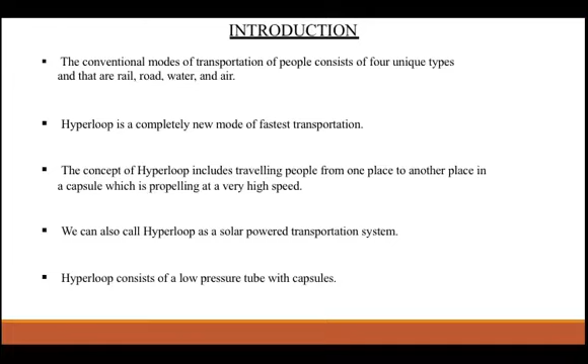So this will come in a later part of my presentation. So next, what is Hyperloop? Hyperloop will be supported on elevated tracks, as I said, and it will be a magnetically levitated train which runs inside a long tube or pipe.

Hyperloop consists of low pressure tubes with capsules that are transported at both low and high speeds. The capsules are supported on a cushion of air featuring pressurized air and aerodynamic lift. The capsules are accelerated via a magnetic linear accelerator affixed at various stations on the low pressure tube, with rotors contained in each capsule.

The inside capsule will have a capacity to hold 28 passengers, and passengers may enter and exit Hyperloop at stations located either at the ends of the tube or at the branches. This system will fulfill the growing need of a transportation alternative, and it will reduce travel time between cities which are congested due to traffic.

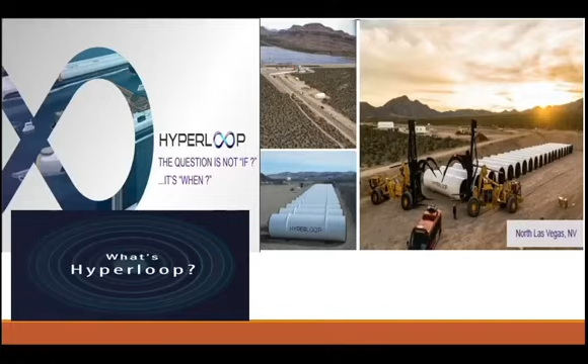Next, let us discuss some history or background of Hyperloop. The Hyperloop concept was invented and designed in 1812 by British mechanical engineer George Wenger, and later polished by various people like George Medhurst in 1827, and later by other people during the 19th century.

Bachelet introduced the core idea behind magnetically levitating trains as early as 1910. Over the years, these ideas have been further refined, for instance, by the Rand Corporation in 1972 with their very high-speed transportation system. This Hyperloop was first proposed by Elon Musk, who is the current CEO of Tesla Motors and SpaceX.

He thought of a dream which would transport people and goods at a speed of more than 1000 km per hour. He proposed a Hyperloop Alpha in a white paper. He wrote his ideas, and later during a press conference he gave a brief presentation on his ideas.

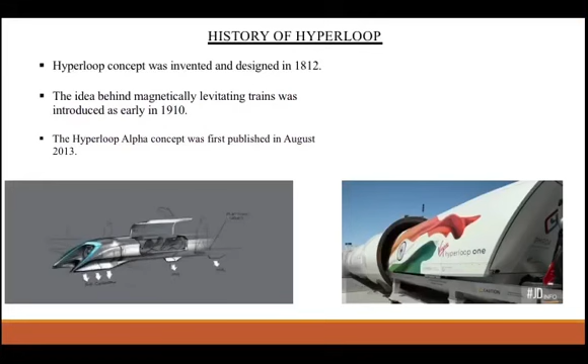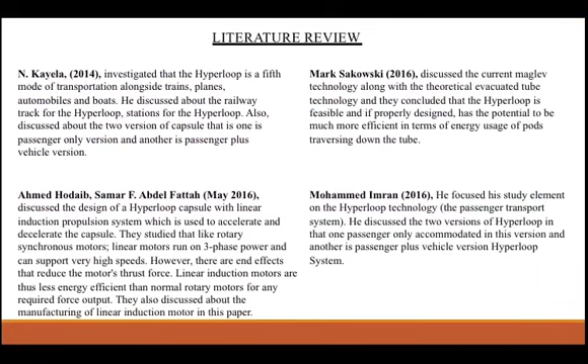Next, literature review. I've collected various literature reviews on my Hyperloop topic, but I've included just 4 because of space.

Next, principle. Earlier I mentioned Hyperloop will work on the principle of magnetic levitation. The principle of magnetic levitation is that a vehicle can be suspended and propelled on a guidance track made with magnets. The vehicle on top of the track may be propelled with the help of a linear induction motor, as passenger pods travel through a low pressure, pylon-supported tube.

In the Hyperloop system, an air compressor fan is fitted on the front side of the pod which sucks the air. It transfers high pressure air from the front side to the rear side of the capsule or pod, and it propels the pod. It creates an air cushion around the pod so that the pod is suspended in air within the tube. On the basis of the magnetic levitation principle, the pod will be propelled by a linear induction motor.

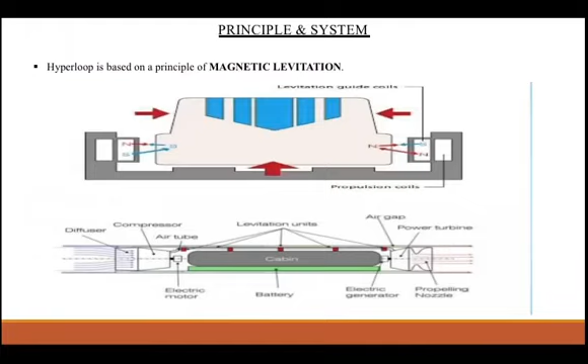By the linear induction motor, the capsule is sent from one place to another place. The pod will be self-powered, as I have mentioned earlier. Next, let us discuss the various components of the Hyperloop system: capsule, tube, propulsion, route.

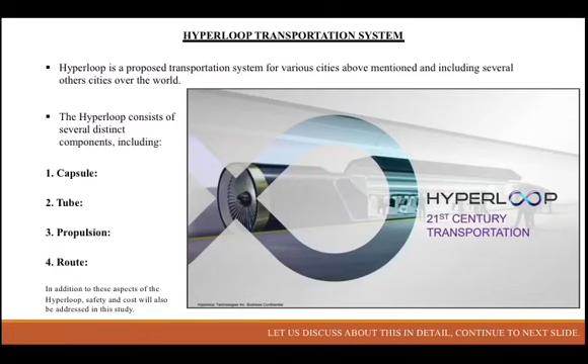First of all, capsule. Capsule is a sealed capsule which will carry 28 passengers at a time, and there will be two versions of capsules. One is passenger only version and second one is passenger plus vehicle version.

Passenger capsule, assuming an average departure time of 2 minutes between capsules, a minimum of 28 passengers per capsule are required to meet 840 passengers per hour. The Hyperloop passenger plus vehicle capsule will depart as often as the passenger only version, but will accommodate 3 vehicles in addition to passengers.

Next, the capsule will be made of the following components: inlet, compressor fan, air storage, firewall, seating, suspension, and batteries. Solar panels will be mounted above the tracks, and the energy stored will be in batteries.

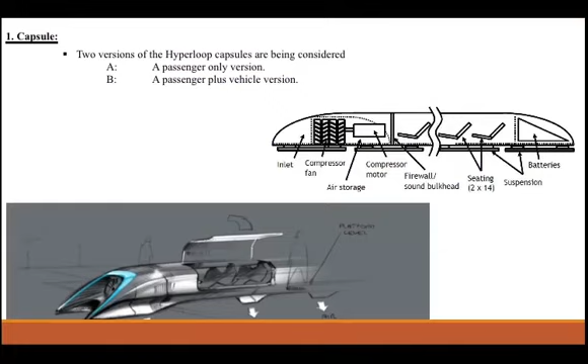The previous figure shows the Hyperloop passenger capsule which was first proposed by Elon Musk in his presentation during Hyperloop Alpha, and later the rendering and conceptual design was also made, as shown.

The expected pressure inside the tube will be maintained around 0.015 psi, which is about 1/6 of the pressure on Mars or 1/1000 of the pressure on Earth.

In order to minimize the cost of Hyperloop, it will be elevated on pillars, which greatly reduce the footprint required on the ground and size of the construction area required, thanks to the small pillar footprint and maintaining the route as close as possible to currently operated highways.

Next, the geometry of the tube will depend upon the choice of the passenger version of Hyperloop or the passenger plus version of Hyperloop.

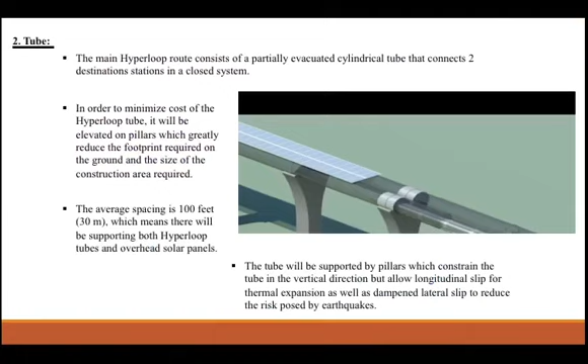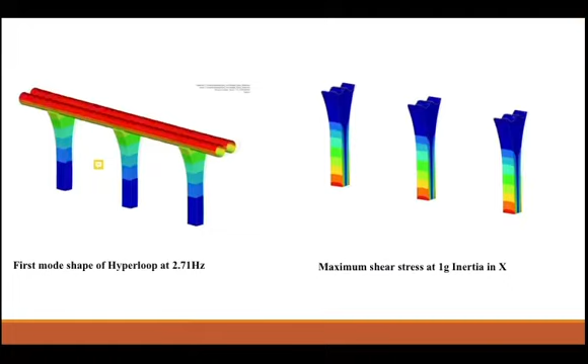Next, this figure shows the first mode shape of Hyperloop at 2.71 Hz, and various mode shapes were conducted before constructing. The second is maximum shear stress at 1g inertia. So these are the tests which were analyzed in Hyperloop Alpha.

Next, we discuss routes. The Hyperloop will be capable of traveling between Los Angeles and San Francisco in approximately 35 minutes. This requirement tends to size other portions of the system given the performance specification of the Hyperloop. A route has been devised to satisfy these design requirements.

The Hyperloop should be based on several conditions: first, maintaining the tube as closely as possible; limiting the maximum capsule speed to about 760 miles per hour; limiting acceleration on the passengers to 0.5 gravity; optimizing location of the linear motor sections driving the capsule; and local geographical constraints such as national parks or railroads, airports.

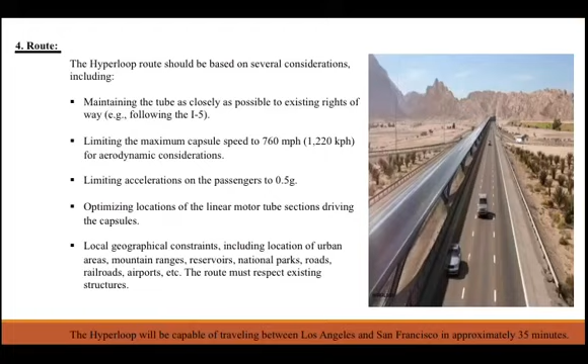The picture shows two routes. The first one is from Los Angeles and Las Vegas. This is another route which was proposed after the first route, and the second picture shows the route between Delhi and Mumbai. This was the second route in India, proposed in 2019.

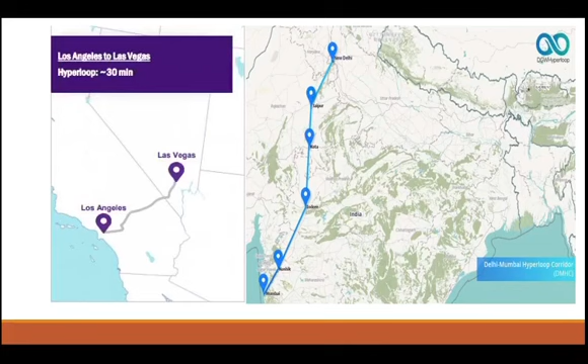So let us discuss Hyperloop in India. First of all, as I mentioned, two years ago the Mumbai government signed a deal with Hyperloop One to propose a route between Mumbai and Pune, that is handled and operated by Pune Metropolitan Region Development Authority. The second one, proposed in 2019, is the Delhi Mumbai Hyperloop corridor.

So let us discuss the Delhi Mumbai Hyperloop corridor, the second route proposed. Currently between Delhi and Mumbai, the travel time is approximately more than 10 hours. If Hyperloop succeeds in proposing and constructing a route, then the travel time will reduce to 3 hours and 52 minutes.

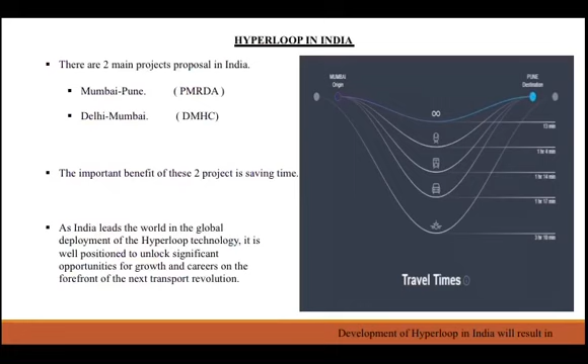This will have an impact on the Indian economy because it will generate more employment opportunities. Due to the Hyperloop, infrastructure will increase, cities will be developed, and business opportunities will increase.

Next, India's need for Hyperloop. The 21st century is supposed to be India's, as everyone knows, but this ongoing process of urbanization would create huge stress in the existing cities, which are already unable to support rapid growth with poor infrastructure.

Now, let us discuss the advantages and disadvantages. Advantages of this transportation system: it saves traveling time, there is no problem of traffic, it is powered by solar panels, it can travel in any kind of weather, cost of Hyperloop is low and it is more convenient, it is resistant to earthquakes, it is pollution free, it is lightweight, and it can travel at a speed of more than 760 miles per hour.

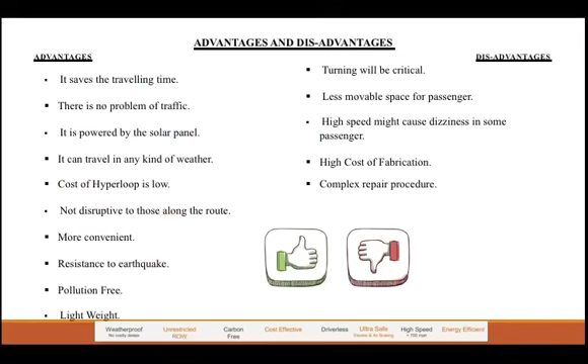Next, we will discuss safety and cost. The design of Hyperloop has been considered from the start with safety in mind. Unlike other modes of transportation, Hyperloop is a single system that incorporates the vehicle, propulsion system, energy management, timing, and route.

Some of the safety scenarios discussed below: on-board passenger emergency, power outage, earthquake, human-related incident, capsule depressurization. For on-board passenger emergency, all capsules would have direct radio contact with station operators in case of emergencies, allowing passengers to report any incident, request help, and receive assistance. In addition, all capsules would be fitted with first aid equipment.

Next, power outage. The vast majority of Hyperloop travel distance is spent coasting, so the capsule does not require continuous power to travel. Hyperloop capsules will be fitted with a mechanical braking system to bring the capsule safely to a stop.

Next, earthquake. Hyperloop capsules would be remotely commanded to actuate their mechanical emergency braking system.

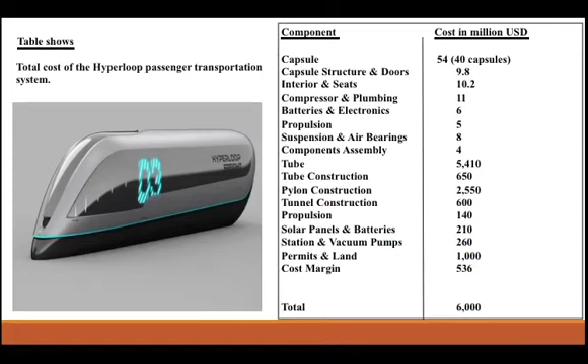Next, there is one more: it would cost slightly more, that is 7.5 billion US dollars, for the Hyperloop passenger plus vehicle transportation system.

Next, conclusion. This will be the first transportation system which will run at more than approximately 1000 km per hour, and Hyperloop will greatly impact the current world because it will mainly reduce travel time due to congestion and traffic. The travel time has increased from city to city, so this system would greatly have an impact on the world.

Conventional means of transportation tend to be a mix of expensive, slow, and environmentally harmful. Road travel is particularly problematic given carbon emissions, and the price of oil is increasing as the environmental dangers of energy consumption continue to worsen mass transit. Hyperloop is considered an open source transportation concept, and it will have maximum safety features and improve passenger capacity.

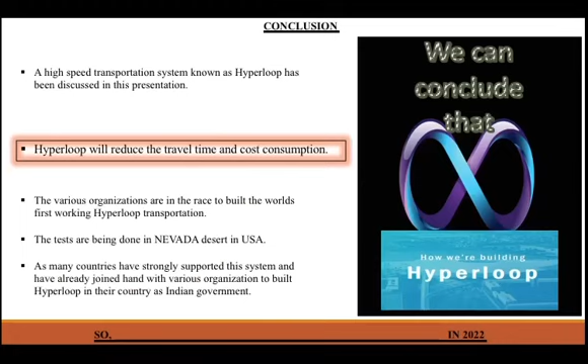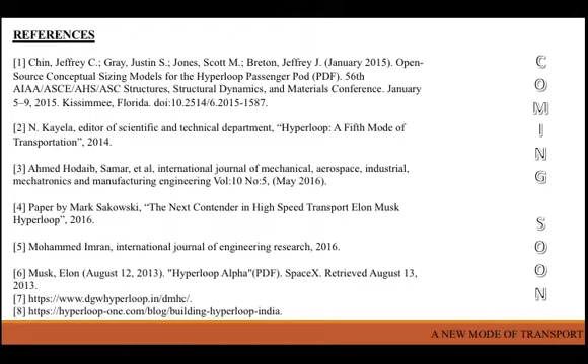These are my references, and we hope that this transportation system will become a reality in the coming future. Tests are being conducted by various organizations, as I have said. In the Nevada desert in the USA, a test track has been constructed and various tests are being conducted. Thank you.